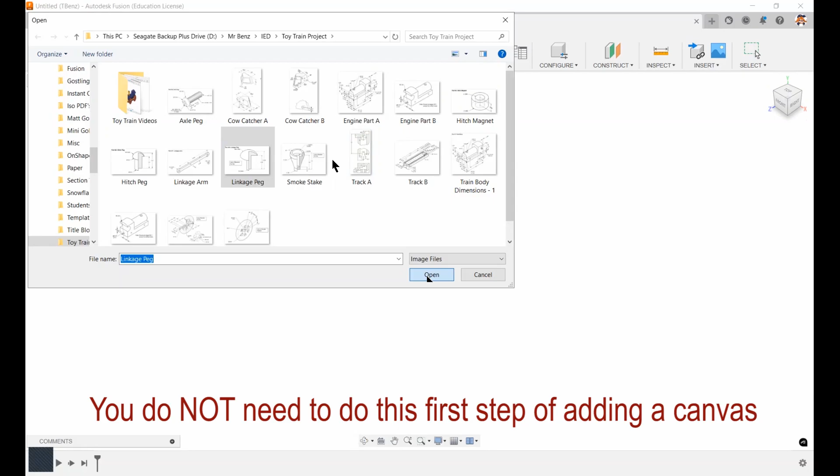As with the other videos, I'm going to insert a canvas. Again, you do not have to do this, I'm just doing it so you can see the numbers. So I'm going to get the linkage peg, put it on that face, make it a little bit bigger, and move it up and out of our way. There we go.

So let's get started. I'm going to start a new sketch. If I look at this linkage peg, it's showing me half inside here, so hint, I'm going to revolve this. It even says use a revolve for this piece.

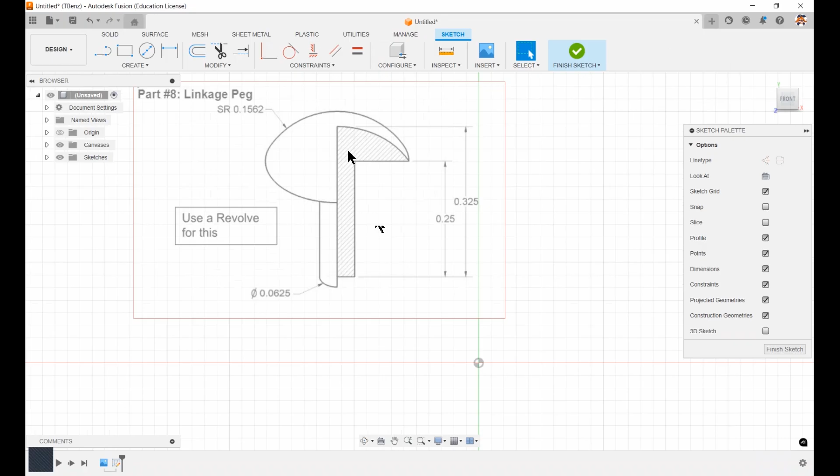So we're going to use a revolve. What I'm going to do is try to make this little rectangle here first, and then I'll put this curved top in. So this rectangle, we're going to start off with a simple rectangle.

And then we're going to dimension it. I'm going to come up 0.25, stopping it right off the top here. So let's dimension. Top of that, we're going to go 0.25.

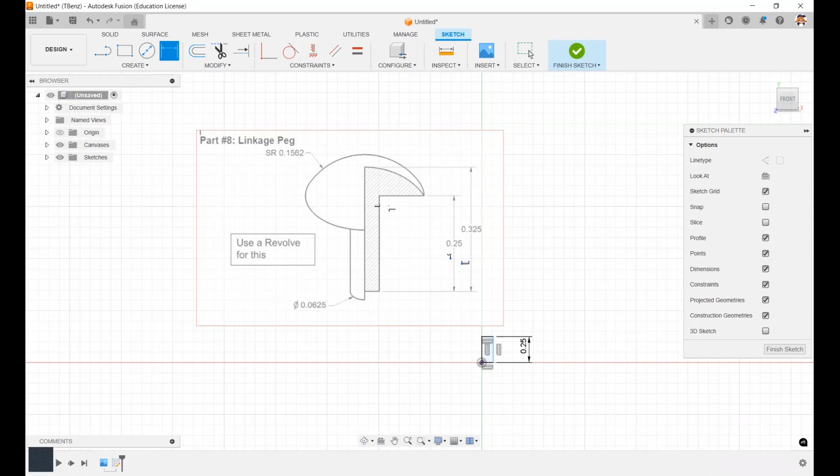Now, how wide is it going to be? Well, it shows me down here in the bottom, my diameter is 0.0625, so I only want half of that. Let's zoom in. I only want half because I'm going to revolve this. Dimension 0.0625, I'm going to divide that by 2. It's going to be real small.

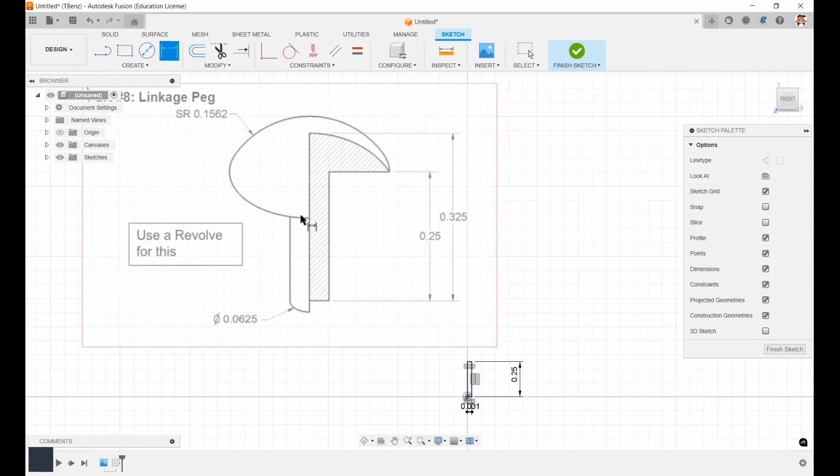There we go. Next, I want to put this little top piece on. So I want to come out a certain distance and come up a little distance. I'm going to put 2 lines in, one from here over, and another line from here up. Okay, so now I have those 2 lines in, and this is going to be a small part.

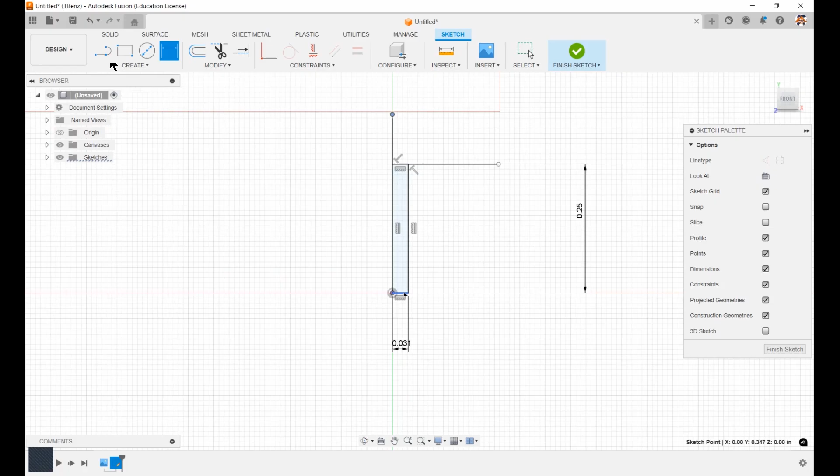Well, the one going up, if I look at my picture from the bottom to the top, it's 0.325. Let's zoom in. So from the top of that line down to this bottom, 0.325. Okay, let's see what else we have.

If I zoom over, I can see I have another spherical radius. So I have a line coming out here, and another line coming out here. And you notice that there's no dimple, this is nice and smooth here. So 0.1562, that's the number, spherical radius.

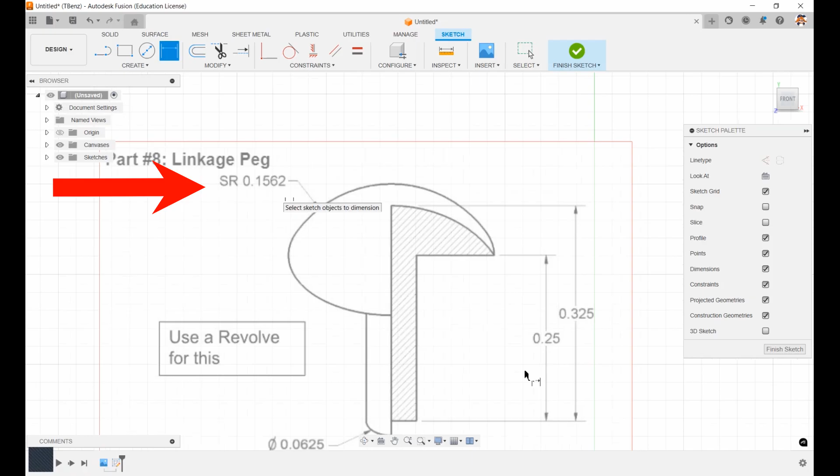So here's what we're going to do. We're going to come back down here. We are going to make another line from the top of here straight over.

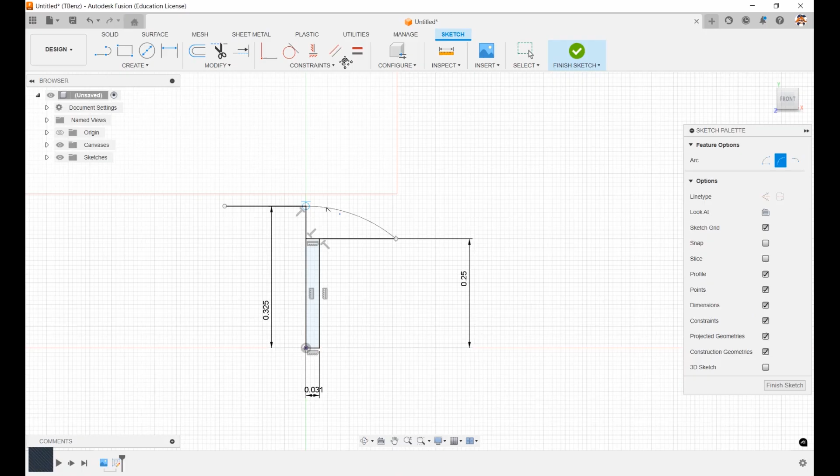I'm going to make a 3-point arc, going from this point here to that point over there. I'm going to try to make sure I can get that little tangent symbol, which you can see very carefully in light blue. It's right there, and it pops in when I hit OK. There's that little tangent symbol. I wanted to make this tangent up on top, so that way I know it's going to be nice and smooth going over.

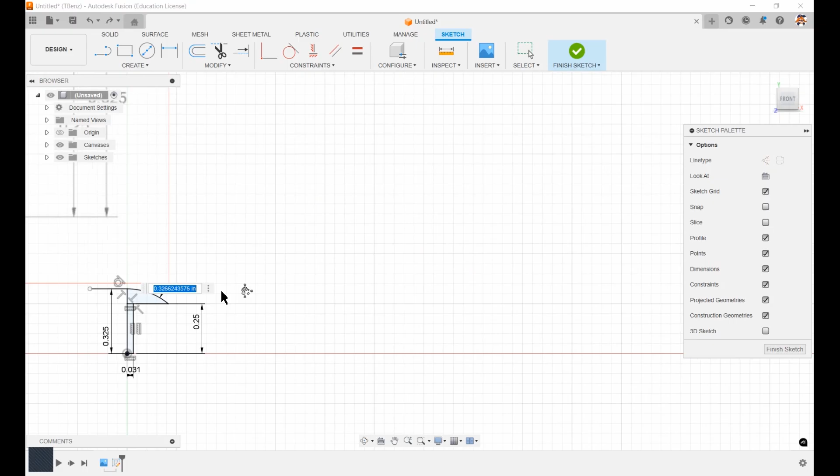I need to put in a distance for this arc. Notice I didn't put any distance in for this line, I'm going to let the arc move the line. So 0.1562, there we go. 0.1562, made that nice and smooth.

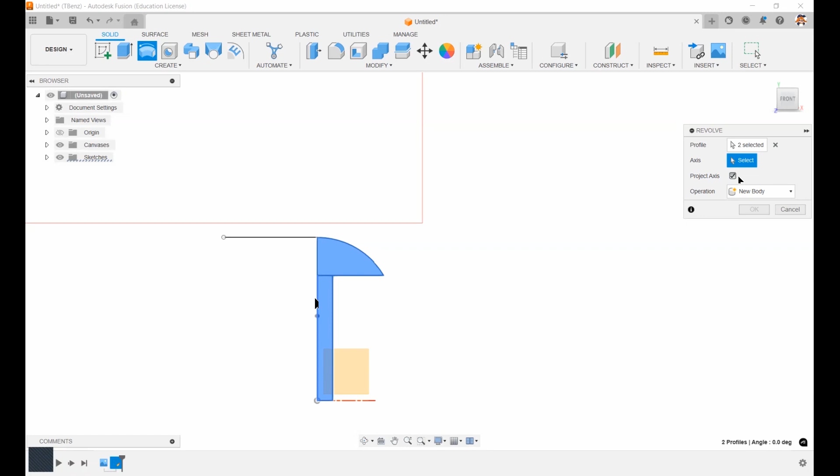We're almost done, finish our sketch. Go revolve, let's grab these 2 shapes, grab this edge right there. For our axis, go select axis, we'll grab our edge, and hit OK.

I'm going to come back down here, I'm going to suppress my canvas, and we'll go to our home view. And there's our little peg.